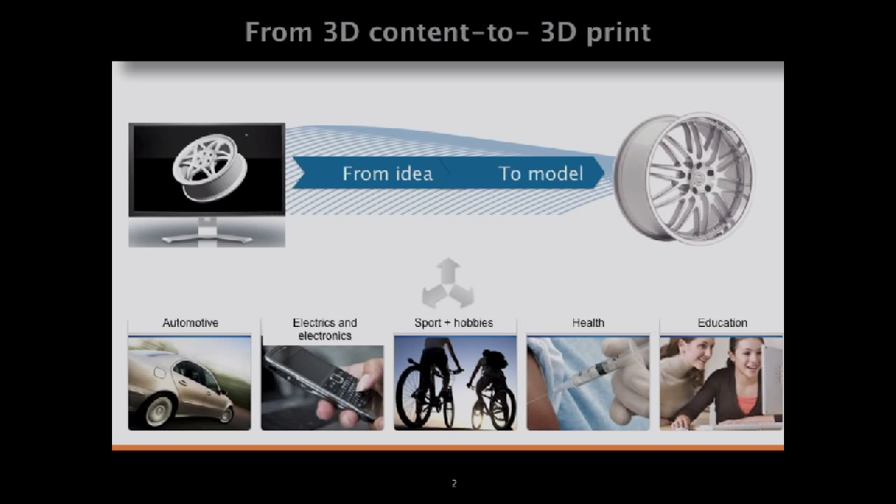It means when I design something, for example in the car industry, I want to design some part for the cars. On the screen I see it in 3D, but once I print it, I can really see all the errors I could make, or all the modifications I have to do, just to have a validated part.

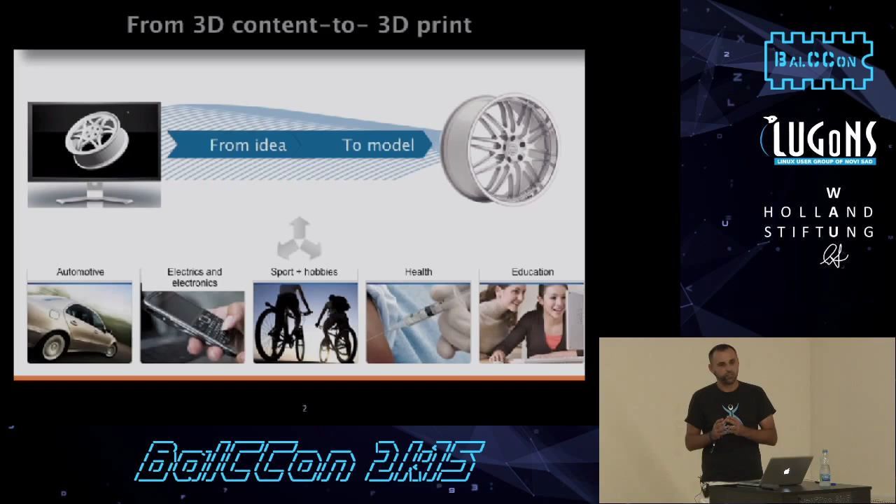After that, we started to go further into electronics. For example, we have cell phones. We make the design of our cell phone, put electronics inside, validate the concept, and once we make the hardware of our cell phone working properly, we can start serial production. So it is kind of an intermediate stage between development and industrialization, and it can save us a lot of money, because once we make errors and discover them during the production process, unfortunately we lose a lot of money.

And for sure, oh, fuck.

About the subjects, I would like to talk about the beginnings of 3D printing, because we started to talk about it a couple of years ago, but 3D printing technology has existed for 30 years. Since 30 years we have been printing in plastics, in metal, and now we are even able to print in chocolate or sugar, in colors or monochrome.

Also about how 3D printing works, how we print in 3D, what is the secret, what is the main procedure, what is the principle of 3D printing, about the printers, and all the interesting applications of 3D printing. Let's start about how 3D printing works.

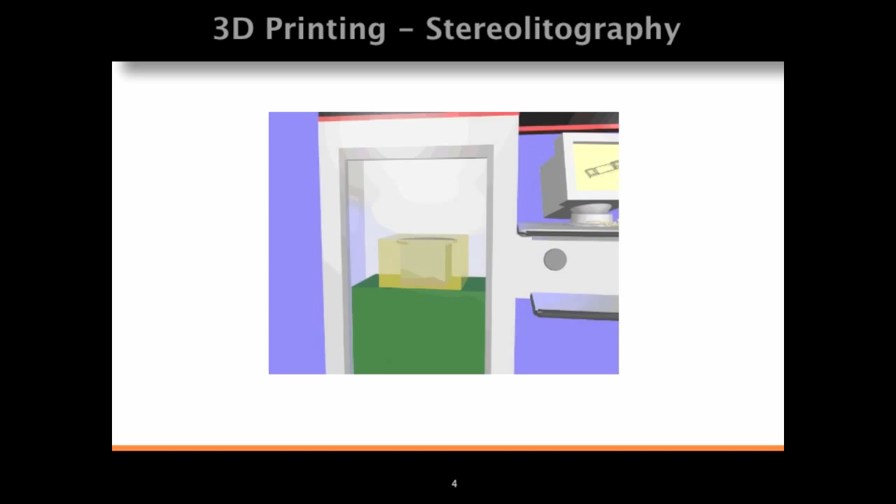Well, you will see liquid plastic and a UV laser that will polymerize it layer per layer. After every layer, the platform with the built hard plastic goes down, and this makes the final model. The technology is named stereolithography, and we use photosensitive polymers.

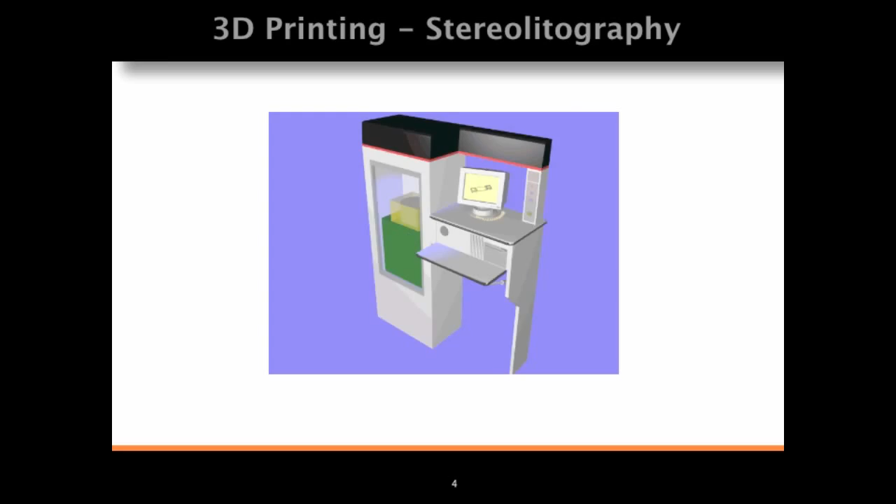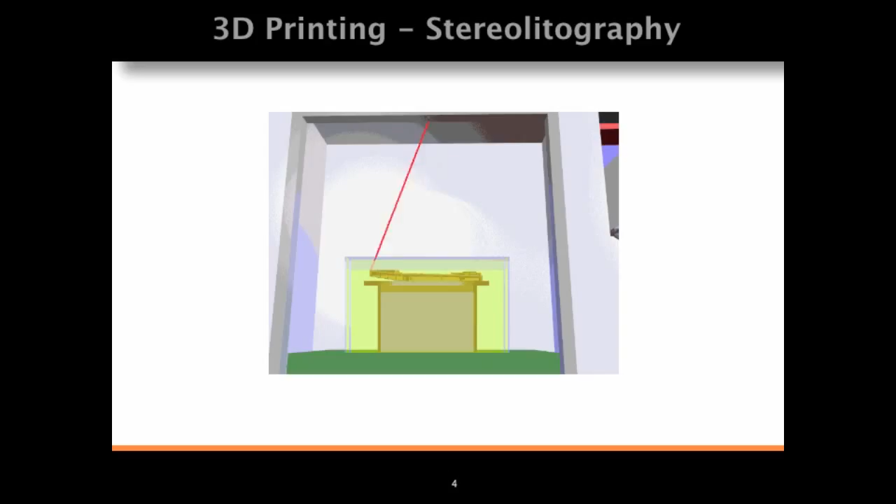This stereolithography technology is very used in the car industry, because for big parts, real size parts of cars, trucks, planes and everything else, we can quickly make the real models and mount them on the cars. For example, all new prototypes of very luxury cars are presented with a lot of printed parts, because we can paint them, brush them, polish them. We can do a lot of things with them. And as we have different types of plastic materials, we can really present a nice and functional prototype.

We can print with liquid materials, meaning liquid plastics sensitive to UV, or solid materials, but solid materials are plastic powders that we melt layer per layer. The main principle of 3D printing is we print layer per layer. If you cut circles and stack the circles, you get a cylinder. 3D printing is the same. So technically, it's not a very complicated process.

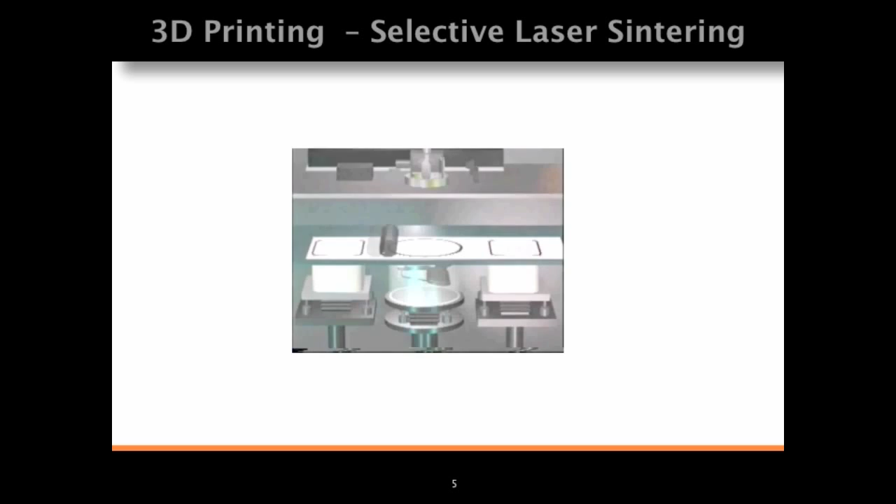Here is how it works with powders. We have a thermic laser that will melt the layer of plastic. Then we come with another layer of plastic powder. We melt it up to the end of the part. And in a couple of hours, we have our part finished.

About price range, we have three groups of printers. We have the personal ones from 1,200 euros up to 20,000 euros.

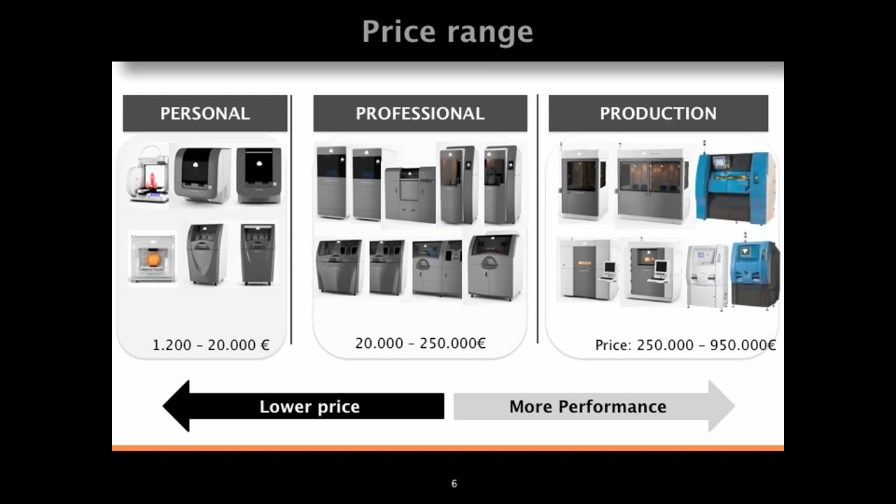We have professional machines used mainly by engineers, architects, people who make the concepts and projects before industrialization. And we have production printers - with those big machines, we manufacture parts that we mount in different industry fields.

For example, General Electric has something like 40 or 50 3D industrial printers. All big industrial leaders are equipped with printers. Formula One teams also - every Formula One team has 3D printers.

When they have some idea for a design, some new aerodynamic parts, they draw it in 3D with CAD tools, then print it. They can mount it on the Formula One car, check the shape, put it in the wind tunnel, and really increase their aerodynamic performance. When we make parts for planes or cars in any industry, we do the same.

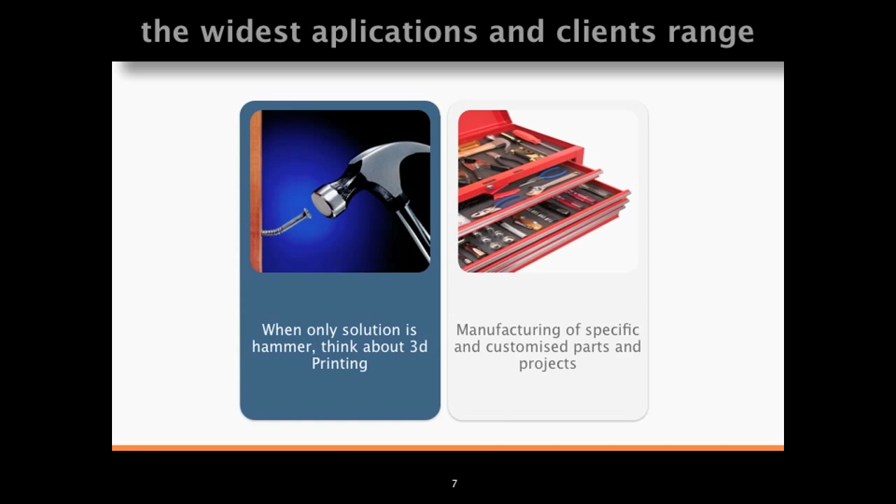As we make it layer per layer, that means we can imagine a sphere within a sphere, and print a sphere in a sphere as one single part. We can also print complete assemblies that you can move, and it's only one part - you cannot disassemble it, you need to break it. Otherwise you would need to spend a lot of time making this by milling, drilling, and other conventional manufacturing methods.

During those 30 years, we got in our portfolio big clients, big companies like GM, Honda, Airbus, Toyota, BMW, Fluke, 3M, Videx, Siemens, and all other industrial companies using our printers.

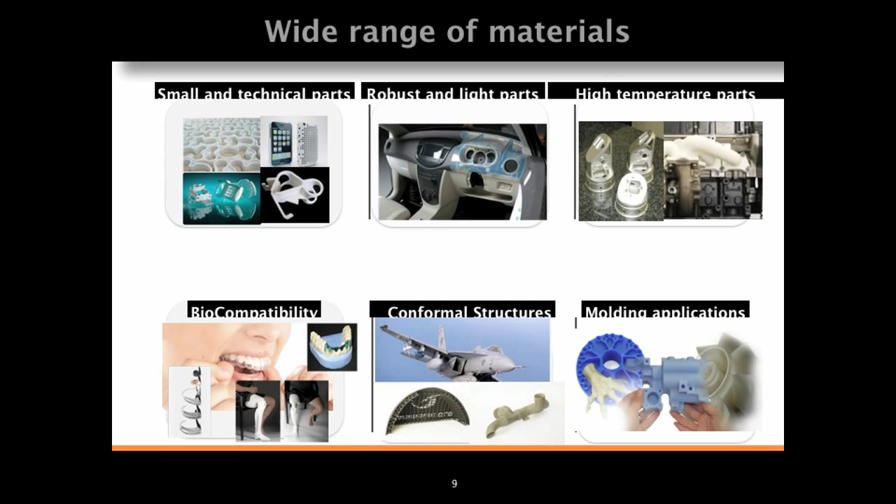Concrete example: I had a surgeon, an orthopedic surgeon, ask me if we could make specific drill machine guides that would allow them to drill the bone at a specific angle, customized to the patient. That means we scan the bone in 3D, and after that design the part adequate to his leg and bone, to fix something in the specific position decided by the doctors and surgeons. And it was possible.

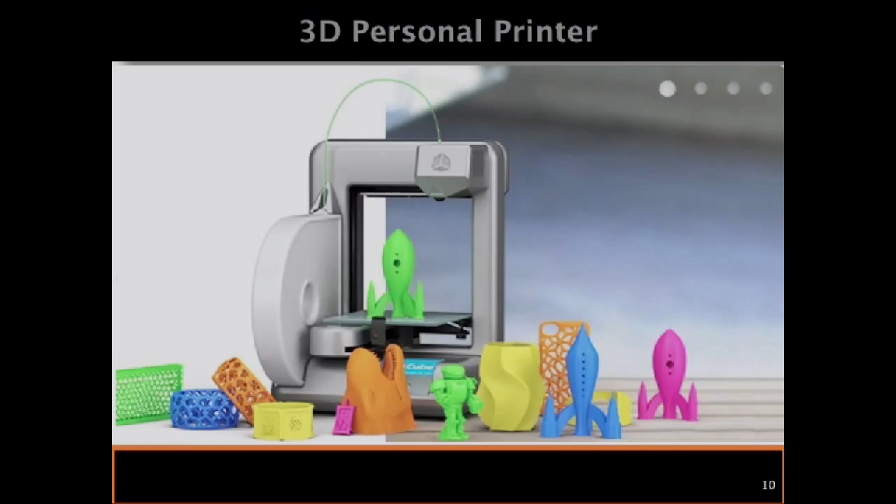I will also talk a little bit about small 3D printers, the printers you can have for your home. Those printers work with a very simple method where you have just a roll of ABS or PLA plastic. It will heat and melt your plastic, and then layer per layer we can design the parts. It's a perfect solution to start with 3D printing.

We can even manage a couple of colors, so we can even make a mix of 3 or 4 colors, for some unique parts where we will just show the shape of the part. It's a very cheap and efficient technology.

What is also interesting about this kind of personal printer is there are heaps of open source machines. That means I will give you some websites after that. You can really order the kit and learn how to do it, and you can make your own printer for less than 500 euros. With 2 normal 2D printers, you can make one 3D printer.

And it's a beginning. It's already something you can design, for example, your house or whatever you want, and you can print it and have it in your hand.

With the same principles, we can even print sugar, even in color. That means if you have a wedding cake, a normal wedding cake, you can scan the bride and the groom, print them in sugar, and then after that the lady eats the head of the guy after the wedding. Or chocolate - if you're a creative person, you can play with the flavor of your chocolate.

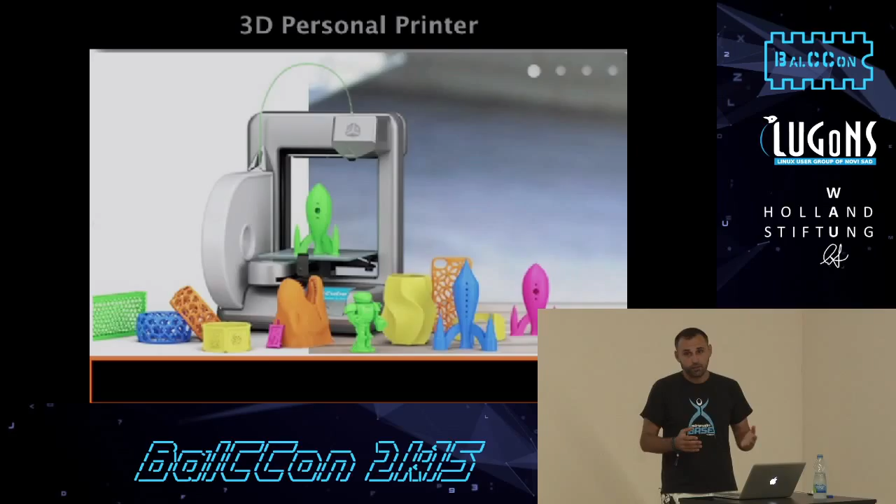Now we have 3D drawing, and we just print it with colors. In a couple of hours, we have a presentation of how our new house or new flat looks like. We can even manage where we're going to put the living room, the bedroom, all that stuff.

You print it, and the final client who will buy the house can see perfectly how it is, how things are arranged, and where he can make some modifications. It really gives us another vision of the future.

About open source printers - here are some websites where you can find all the information about those printers. The RepRap is one of the first ones.

MakerBot - they started like open source, but then came also the professional part of the story, and they also try to get some money and make money with this. EventorBot, 3D Hubs, all of those websites give you tutorials on how to create your own 3D printer for cheap.

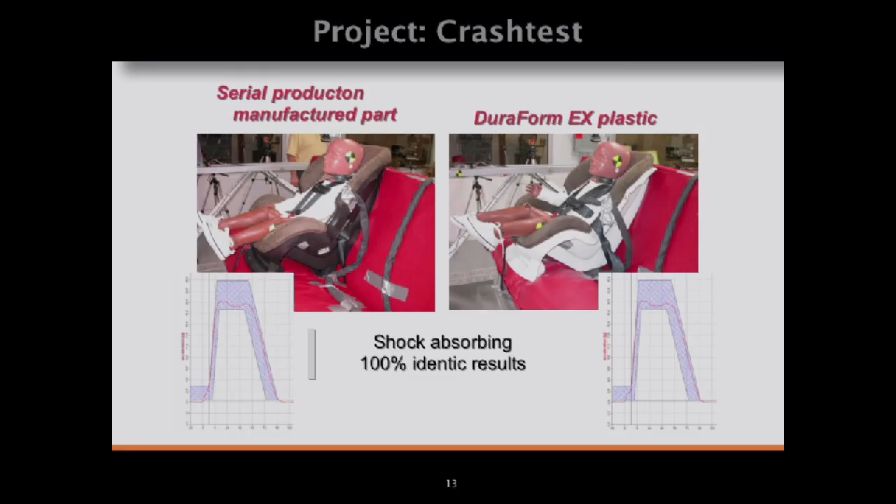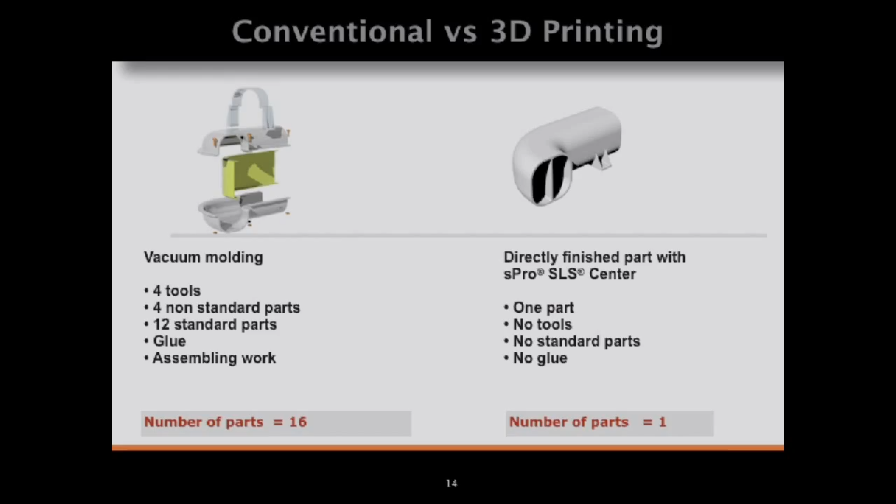Otherwise, we have, for example, conventional versus 3D printing. Same part with the same function - you have air passing through the part. With conventional methods, you need 4 tools. You have non-standard parts, standard parts, glue, assembling work, and it takes more time and is more expensive than the directly printed part. With printing, there are no tools, no standard parts, no glues, nothing.

A real application of all this is cooling systems of electronics in combat planes. As they have a lot of electronics left, right, up and down, you need really complicated ventilation pipes and parts. With conventional methods, you need 10 days to make the final part. With 3D printing, you make it in 1 day and just mount it in the plane.

Airbus started to use these kinds of technologies to realize the non-functional parts of the planes. So when you fly on the new Airbus A320 series, you will have 3D printed parts - some holders, brackets, and all things that don't concern the structure of the plane are printed. It goes much faster, and we can make lighter parts.

About materials, we can have really a wide range, and we can also have reinforced materials - plastics with metals, plastics with carbon fiber, with nanoparticles, with glass nanoparticles. For 1.5 kilos per cubic decimeter, we can have really rigid and resistant parts - as resistant and rigid that we can mount them in Formula 1 and go on the races with them.

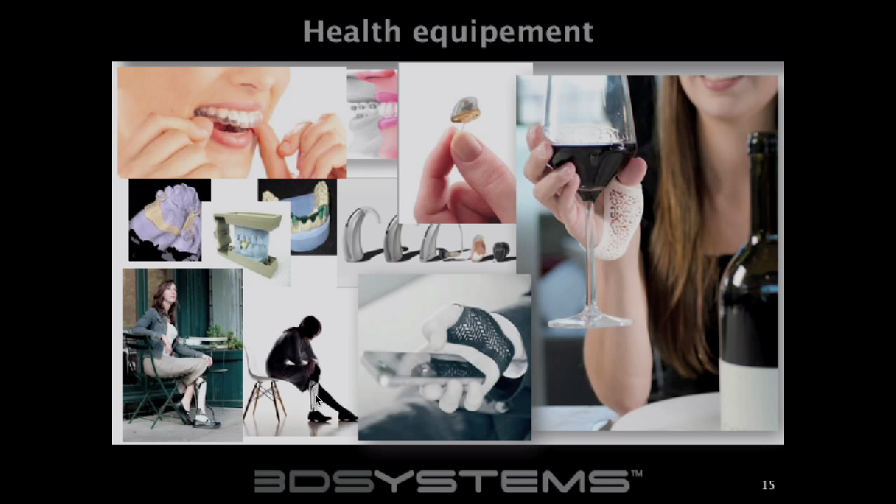Hand support also printed. The prosthesis printed. We also printed for one dog who had a problem with his legs, two front legs. He could never walk with them because they were weak and cut. I think you can even find the clip on YouTube. We printed the prosthesis for the dog, and with those 3D printed prostheses, the dog started to run and enjoy life as never before. So even for a pet with a problem, you can try to find a way to resolve it with 3D printing.

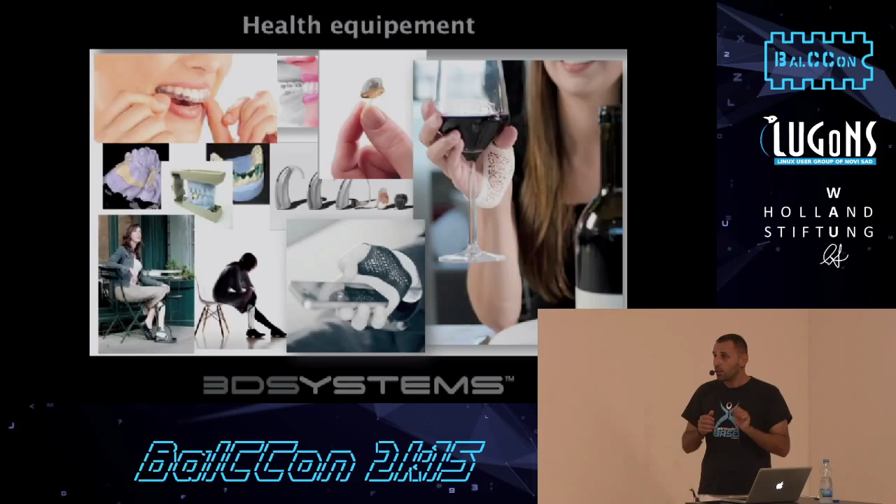Dental industry also. Now for the prosthesis, we don't take the print of the tooth anymore with rubber and chewing gum and all that stuff, we scan with a 3D scanner. Once we scan it, we print the teeth, and then we can make custom-made prosthesis for this person. Because everybody has his own morphology, and with these technologies we can really adapt all repair kit tools to the person. And like this you can have better results, and finally, we are humans, and if we develop some sciences and technologies, it's a good way when it serves the human, to improve the capacities of human, not to kill other humans.

Otherwise, you heard, I think, the big boom of 3D printing is the guy who made his gun with 3D printing. It's more or less fake. I mean, you can print some parts with your small personal 3D printer, but after the first shot, it will explode in your hand and cut your hand. So you can really only print a couple of decorative parts. And I think that healthcare equipment is much more interesting than manufacturing of guns.